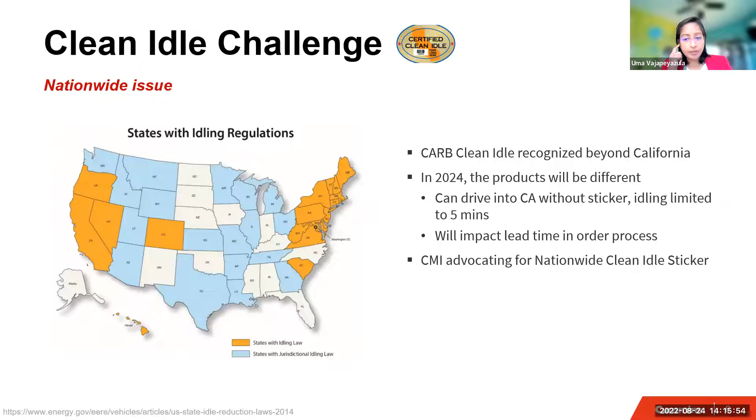The one other regulation to be aware of is the CARB Advanced Clean Trucks regulation. And then another one that's in the works is an Advanced Clean Fleet regulation. The ACT is a little bit more firm than the ACF.

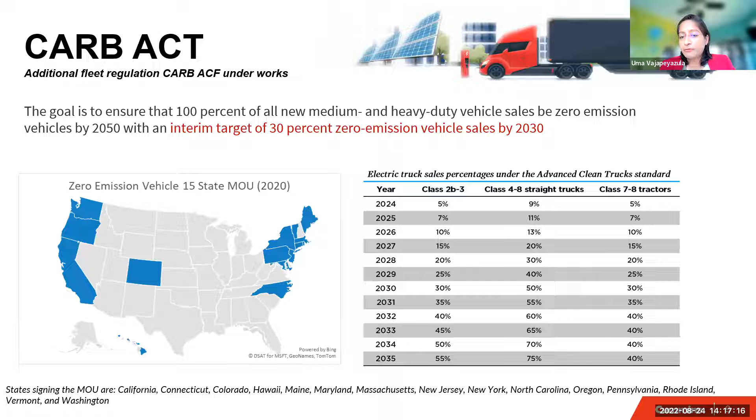So that was the summary of all the different regulation elements that we're tracking. Obviously, ideally, we have a zero emission solution that's capable, reliable, mature. There's infrastructure, like a battery electric vehicle or a fuel cell, then problem solved, right? Let's all move to that solution. I think the challenge, obviously, is the architectures and technologies available today have limitations. Battery electric vehicles come with infrastructure needs, they come with payload trade-offs, and how far can you really go, right? That becomes the most important question.

So there are some applications, return to base, maybe urban applications, travel less than 100 miles a day, where that might be very easy, right? Like school buses, transit buses are good examples where they may find a faster path to an electrified vehicle than regional haul trucks that go 300 miles a day, or long haul, that's pretty far off to meet the needs of that segment. So one thing that this is going to drive is somewhat of a divergence: what works for one application may not work for another application.

And then there's also divergence in what state and where these regulations are needed. So it starts to fracture the market a little bit on what solution works where. And that's really what the messy middle we're talking about is all about, right? That there's no one perfect solution. We're going away from that ubiquitous diesel solution that we have today to different solutions that are going to work for different people. So this is exactly why Cummins is very focused on alternate fuels right now. We think they will play a bigger role.

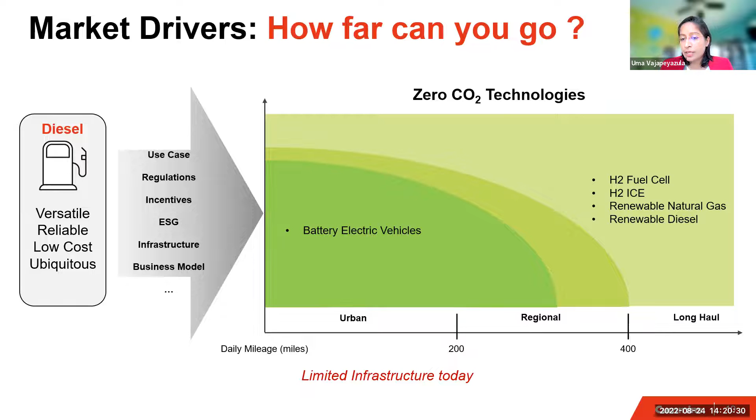We're actually going to take a leadership role and say, decarbonization starts today. We're going to do our best to bring the right products that'll actually make a difference and not just wait for that perfect solution. And we think it's a long road, right? So that's what you will start to see in our product portfolio, that we're investing very heavily in our advanced diesel products. We don't like compromising power, as we like to talk about it. For the sake of regulations and all of these challenges, we don't want to short circuit what our customers need to get their work done.

We're actually looking at increased power density across our diesel portfolio. So advanced diesels that meet more stringent regulations and also bring along these alternate fuels, like natural gas and hydrogen internal combustion engines, gasoline and propane in our medium duty. They all are going to find a place with the diverse applications that we have in the market.

So for the 0.05, 75% NOx reduction as early as 2024, we're investing in our 15-liter diesel that can perform at that level. We're introducing our brand new 15-liter natural gas. Today, the highest displacement we have is a 12-liter, and we're going to bring a 15-liter. And that is game-changing because now you can think about natural gas in line haul applications, right? So in addition to the existing portfolio of our L9 natural gas and the B6.7.

So gasoline and propane. Today, gasoline serves the lower power needs of the market. Diesel serves the higher power needs. And there's never been a good trade-off where we can say gasoline works for the higher power needs and torque needs. That's really what we're changing with our gasoline and propane. We think Cummins is uniquely positioned to be able to do this.

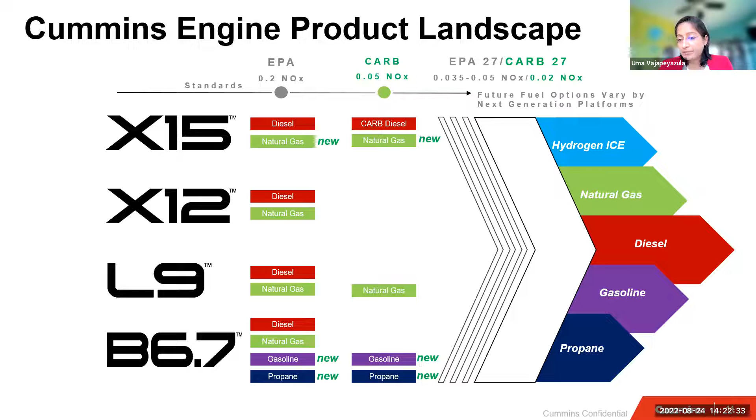And how are we going to do it? When there's so many different products to be created and invested in, integrated into vehicles, it's very challenging, right? So when you're doing everything, maybe you're not doing anything. That's really what we want to avoid. So this is kind of our trick up our sleeve. We are very intentionally architecting our next generation of platforms to be multi-fuel capable.

We are going to make sure the same platform that the advanced diesel will come in can also have a natural gas variant, can come in a hydrogen internal combustion engine variant. Largely the differences are going to be in the cylinder head and fuel system for obvious fuel system differences. But head below, as we like to call it, these engines will be very identical. So service, parts availability, how it integrates into a vehicle, they'll all start looking very familiar so that this energy transition can be even easier, right?

So this is our strategy on how we intend to bridge this messy middle. And we really think Cummins is uniquely positioned to be able to do it. There aren't a whole lot of our competitors who have this kind of scale globally, the legacy of reliable products that we can build on to bring all these alternate fuels. And, like I said, we don't like to compromise power. We need to make sure our customers are able to get their work done in an economical way while meeting the most stringent emissions, right?

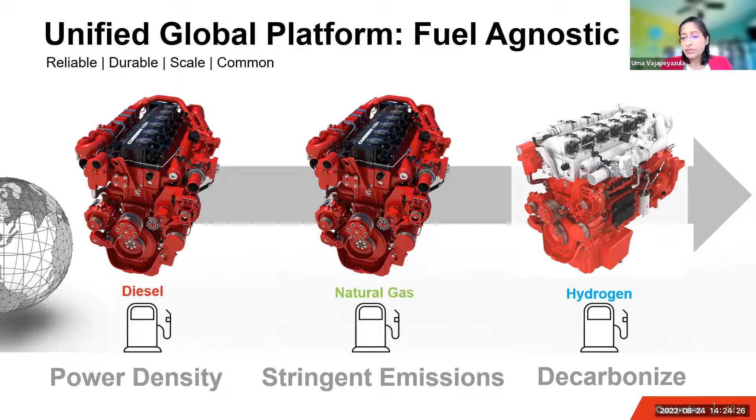We like to do that early. We pride ourselves in bringing the most stringent emissions products early. And we're very motivated to decarbonize, right? Decarbonization starts today is what our Destination Zero strategy is all about. So with that, I'm going to hand over to Mark, if you want to talk us through how the customers will experience this.

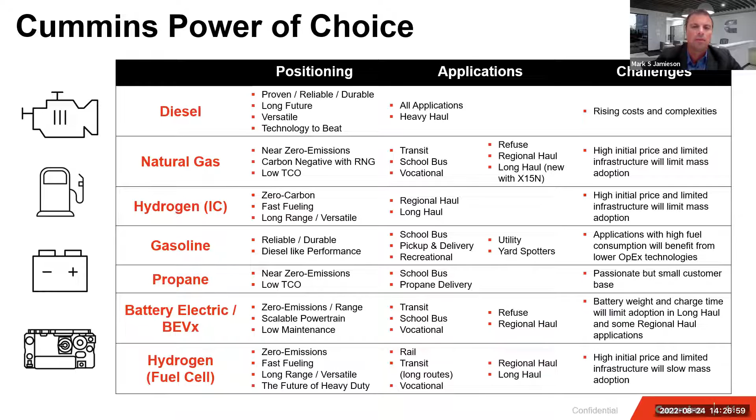Next one. I wanted to spend a couple of minutes just talking through some of these key technologies, trying to help build that picture. In particular, Uma was talking earlier on about the propane octane engine. We're very excited about this product. It's delivering, as she said, our target as we think about our core customers and trying to ensure we're delivering this diesel-like durability, diesel-like performance. So we're really trying to hone in on that from the product.

But we also see it, the way we're doing this, it's going to be a first in the industry. We're going to build it this way. We do it differently. We're going to have a turbocharged spark-ignited platform for both of these technologies or fuels, and targeting that to make sure that we're still delivering that diesel-like durability and performance becomes key to making sure this product still slots in and works for our customers.

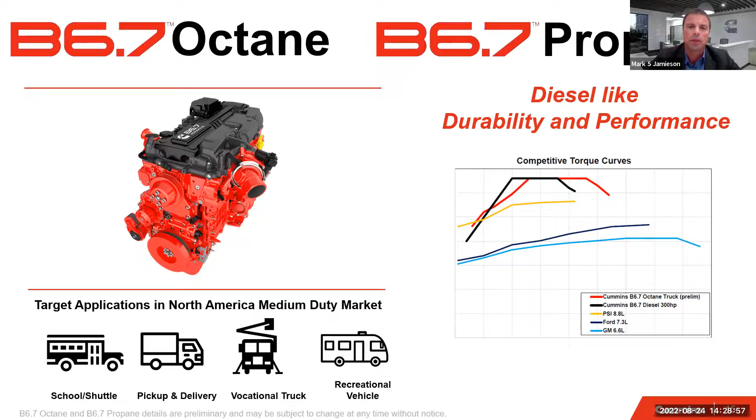So the other one I also wanted to cover, we have this full list of products and trying to think about optimizing time today, we picked a couple on here. We've just made some big announcements with our X15N. When we think about this product, it's something that we're very proud of. It's a new opportunity that we see it's opening up. Again, what this X15N is really leveraging is trying to provide a diesel alternative. It has diesel-like torque. So we're trying to really be able to offer this up for line haul duty cycles.

By the nature of natural gas, we can also have this as a renewable natural gas solution. Again, we think about path to zero emissions becomes very important and carbon negative, depending on where you're registered for this. So it actually has a big upside from a carbon reduction standpoint. And this is really the first big bore natural gas powertrain we're seeing. So Cummins is introducing something again unique and industry first. We see it's going to be able to meet CARB 24, 27, as well as the future EPA NOx regulations. So it's a significant life of this product when we're introducing it as well.

And what we're covering with this product and some of the learning that we've learned about our natural gas experience of the products in the past, we've been implementing a lot of the fixes and improvements, making this a clean sheet design, picking it up from natural gas as Uma presented on the fuel agnostic strategy and building up the engine platform that way.

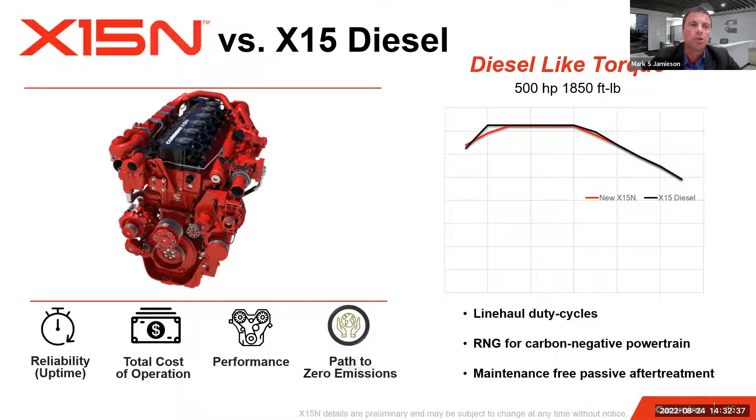If you're driven by scope 3 emissions or you're being driven by some of the larger partners that you may have, having these technologies can help you also meet greenhouse gas reductions for them, meeting requirements, and it's going to become a driver, and more and more customers we see either driving for it or being driven to find alternate solutions. So we wanted to highlight the octane and propane options today as two good new technologies coming that we think will drive some interest for you to follow up on.

I think if we can move to the next slide, Uma, we make a bit of a transition now into our electrified power, for which we have really principal technologies, battery electric and fuel cell, and we've just made a recent addition to our family with Meritor. So I just wanted to talk through some of this. Our electrified power product, thank you. I'm trying to split it out to cover battery electric and fuel cell here, and using this slide to articulate how we do a lot of work with various segments, similar to what we were showing where Cummins is active today.

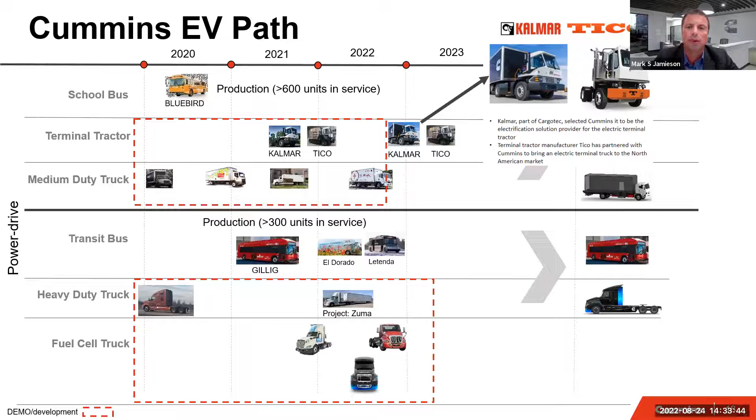And the key for this slide is trying to show that we've been in production for quite some time with battery electric systems, both Bluebird school buses at the top and Gillig in the middle portion there, transit buses. Been in production for many years. We have almost 1,000 units in production today. We do a lot of demonstration work with partners to help demonstrate either battery electric or fuel cell technology in different duty cycles, different missions, looking at different chassis as well to work out the installations and support from an OEM development.

And what we see coming up on the screen here are some recent announcements that we've also made. From a battery electric standpoint, terminal tractors, Kalmar and Tico, recent announcements, and they're actually in production and available as of this year with ramp up volume, finding its way into full production next year. We have powertrains in those, and they've been at various shows throughout this year, and we'll see them appearing in exhibitions and shows next year with Cummins powertrains as they're promoted and launched further.

Likewise, from a medium duty truck, battery electric standpoint, we have Isuzu. We've announced a partnership with them on prototypes. So with the Isuzu prototype truck, we're actually putting it out in the fleet. It's been deployed now. We're now building second sets of these medium duty truck chassis with a range that meets what we believe to be the market requirement for that size of truck.

What it does mean is with battery electric, you can adjust battery sizes. There are trade-offs between them. So we've been spending a lot of the time with these demos learning about the technology, proving out our service capabilities, and making sure that when we put these units in the field, we have the same coverage that's expected for diesel today and the same capabilities.

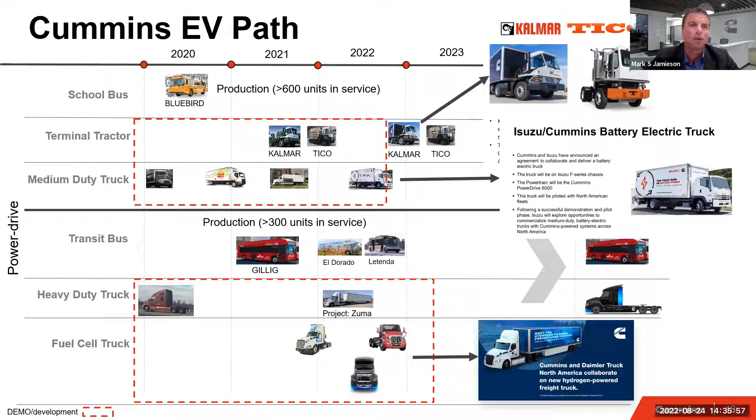And just going to the last slide, within Cummins, it's just recently happened, but now Meritor is part of the Cummins group as well. So as part of the Cummins family, I wanted to make sure that we didn't ignore this, that we talk about where Cummins has battery electric presence today through its battery electric and fuel cell systems. Meritor is a big complement to the Cummins organization. It already has numerous customers installed within its electric vehicle space.

We see some of them here, but what you see is that through their e-axle and other components, Meritor's additional products, already in production within medium duty and heavy duty, present greater opportunity to experience Cummins product, but also a feel for how Cummins' broader product portfolio can stretch across these OEMs as we collaborate with OEMs as we do with every product we have today.